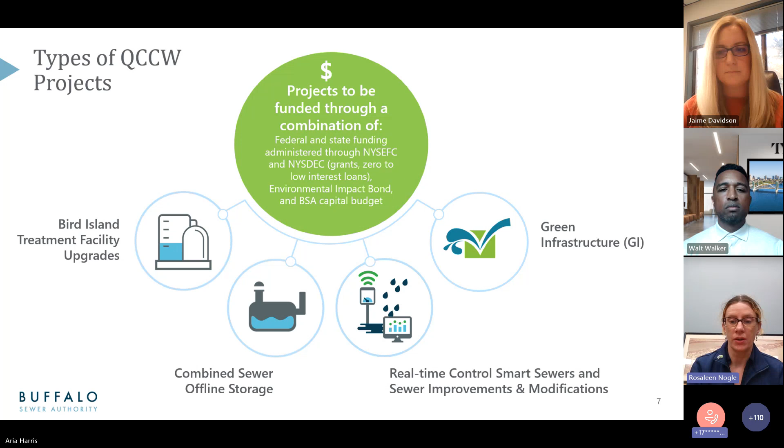And then we are also going to be entering into the world of combined sewer offline storage in the next few years. We've already started last night with a scoping session on a project on Delavan, and we look forward to sharing more information about many of those projects.

Thank you, Rosie, a great overview. We've broken up this next section on upcoming projects into two sections: one on the upcoming collection systems projects, and one section on the upcoming facility and Bird Island projects. So for this segment on the collection systems projects, I'm going to turn it over to Jamie.

Thanks, Walt. Yes, so the first round of projects that will be coming up in 2025 for construction are a series of modifications to existing sewer patrol points in Buffalo Sewer's collection system. I think a lot of people on this call are familiar with Buffalo Sewer, but if you're not, a sewer patrol point is really a regulator structure.

So what that does is in dry weather, base flow goes through the structure. It's considered an underflow pipe. And as wet weather events happen and the water rises, it will overflow an overflow weir in the structure and then go out a combined sewer overflow. So the point of these projects is really to try to maximize the amount of wet weather flow that is getting to the treatment plant for treatment and minimize the amount of water that is getting out to the river and to the adjacent water bodies untreated.

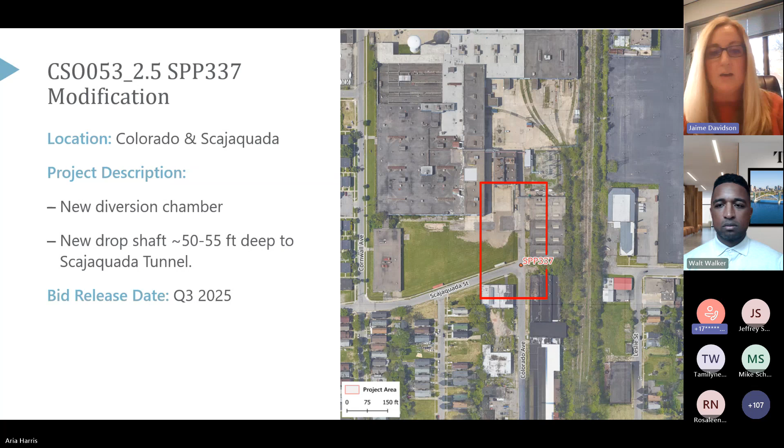That will ultimately be making it to the Scajaquada Tunnel. So we will be putting in a new diversion chamber at the sewer patrol point, and also a new drop shaft that's going to be about 50 to 55 feet deep, and it needs to be designed to accommodate a flow of about 48 MGD. So that'll give you an idea of how substantial that is. That project, along with all of these projects, is expected to come out for bid hopefully in Q3, potentially Q4 of 2025.

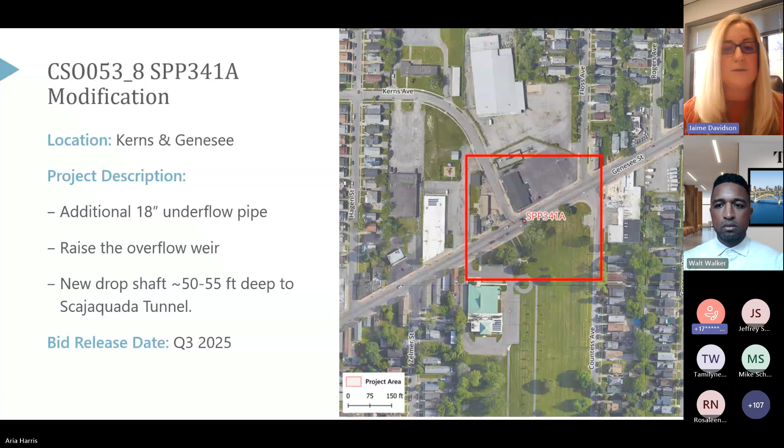So the next site is the Genesee site. Similar to Colorado, this one will also involve a drop shaft. We will be doing some modifications to the actual sewer patrol point, which include raising the overflow weir and installing some additional underflow pipe that is 18 inches in diameter. Ultimately, this will move into a new drop shaft that will be located in Schiller Park, which is the green area shown there. Again, this drop shaft is expected to be 50 to 55 feet deep. This one is a little bit smaller than the previous, but it's going to accommodate about 26 MGD, so that'll give you an idea of the size of that that will be coming up.

And then the remaining 6 projects are really a series of weir modifications and additional improvements. This one at Bailey and Kerns is going to enlarge the underflow orifice, and in addition to doing that, we are going to both raise and lengthen the weir. Very likely there will be a serpentine style weir that will be installed in this location.

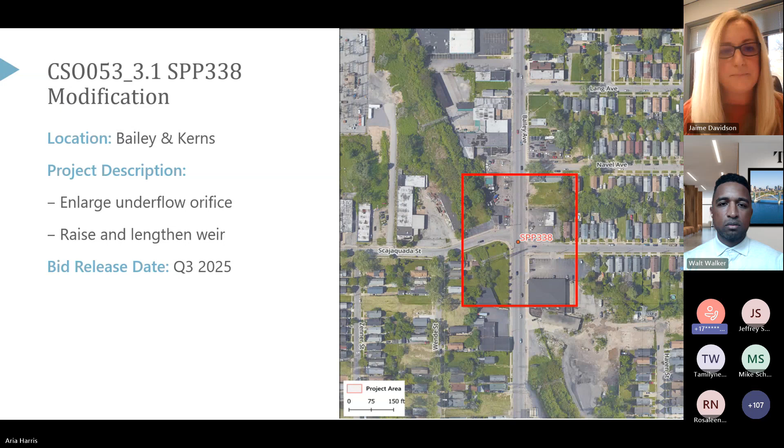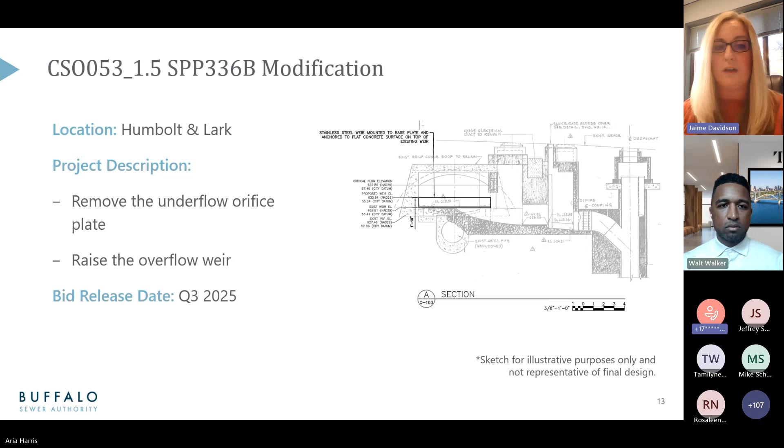The next one is Humboldt and Lark, SPP 336B. This might be one of the more simpler of the projects. This is just removing an underflow orifice plate and raising the existing weir.

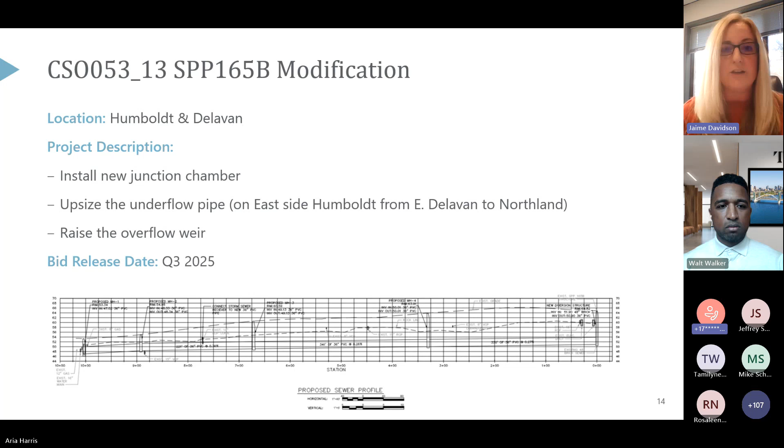This modification at Humboldt and Delavan, in addition to raising an overflow weir, actually involves installation of a new junction chamber to facilitate an upsized pipe. So we're upsizing the existing underflow pipe, about 1,000 linear feet of 24-inch sewer, to 36-inch. This one will be more substantial of the SPP modification projects in this contract.

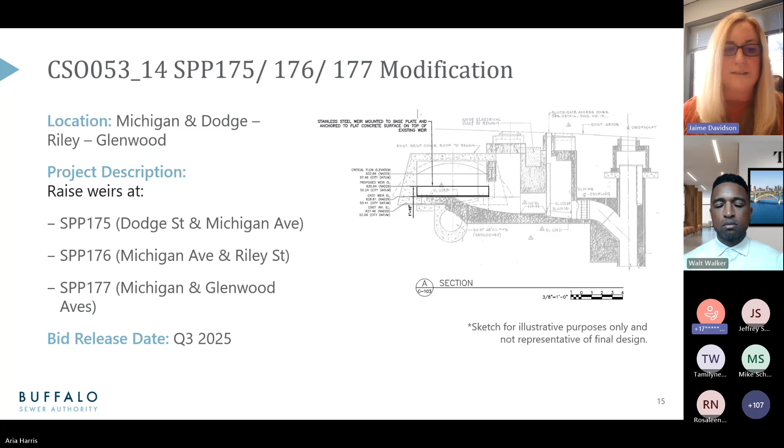And then the last grouping, there's 3 different sites all on Michigan that will include weir raising. And with that, I will hand it back to Walt.

Thank you, Jamie. All right, so moving on to facility and offline storage projects. We have Sydney and Lark and Edison Martha offline storage. Those are going to be significant projects happening in the city.

Still in the process of conceptual design. Our program team will be taking it to approximately 30% design, getting the concepts hashed out, at which point they'll be released as an RFP for another design consultant to take that to the finish line.

Breckenridge Street CSO project design underway. Bid advertisement will be occurring in Q1 of next year. And then we have several other large facility projects that I'll talk about in the upcoming slides.

All right, first one, another offline storage project at Sydney and Lark, 3.2 million gallon underground tank, just a stone's throw away from the Kensington Expressway. The Sewer Authority is in the process of negotiating ownership of that lot, but the goal is to dewater via gravity to the Scajaquada Tunnel interceptor, and the RFP release date for that is by the end of this year.

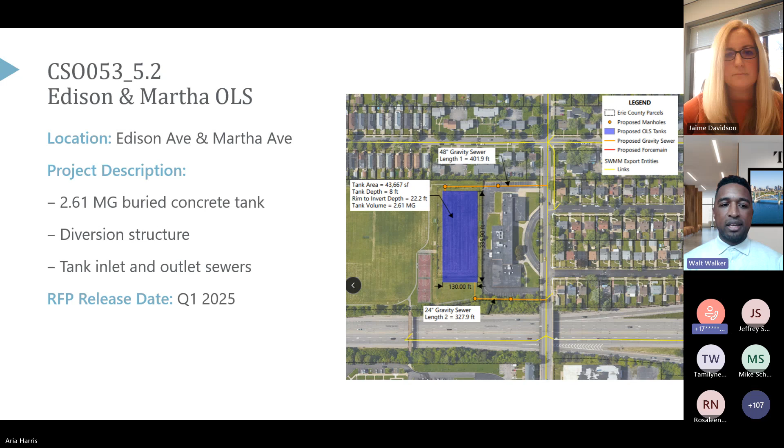Edison and Martha offline storage tank right by Roosevelt Park and a school lot, a 2.6 million gallon buried concrete tank, not as deep as the Sydney and Lark, but significantly wider, which will feature tank inlet and outlet sewers.

Breckenridge Street CSO project. This is a project that was reimagined from traditional real-time controls for those that are aware of some of the previous real-time controls projects. But this is going to, after some alternative analysis, now be converted into a CSO sewer line project.

Occurring between Breckenridge Street and West Ave, all the way to Lafayette and West Ave. Goal of this project is to replace and reverse the slope of an old brick Breckenridge Street sewer, over 100 plus years old, to discharge the new sewer on West Ave. The size of this line will be approximately 30-inch in diameter, RCP pipe as of now.

And the new West Ave line will connect to a drop pipe manhole structure at the Scajaquada tunnel. So in addition to the deep excavation for the CSO pipe, there'll also be this deep manhole structure. So a lot of excavation and potential dewatering.

All right, South Buffalo Pump Station, by the Buffalo River, off the intersection of Bailey and Old Bailey Avenue, which is right south of the intersection of Elk and Bailey.

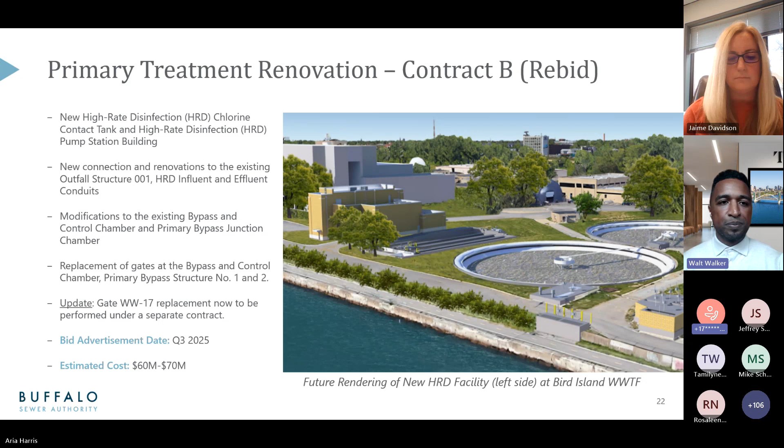A few additional details on the HRD pump station. I won't get too much into details here, but this presentation will be made available after this meeting is complete. 5 40 MGD submersible pumps, 160 MGD capacity, 3 chemical storage tanks for the sodium hypochlorite.

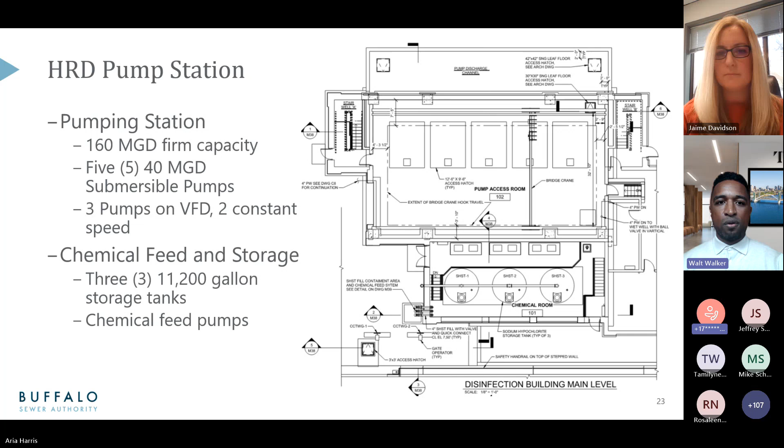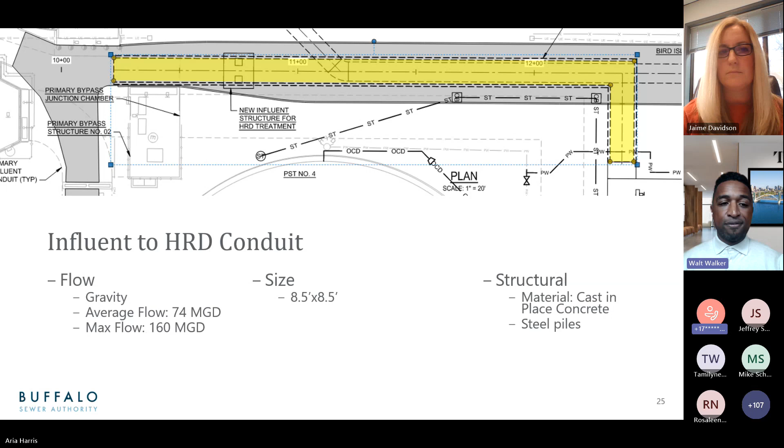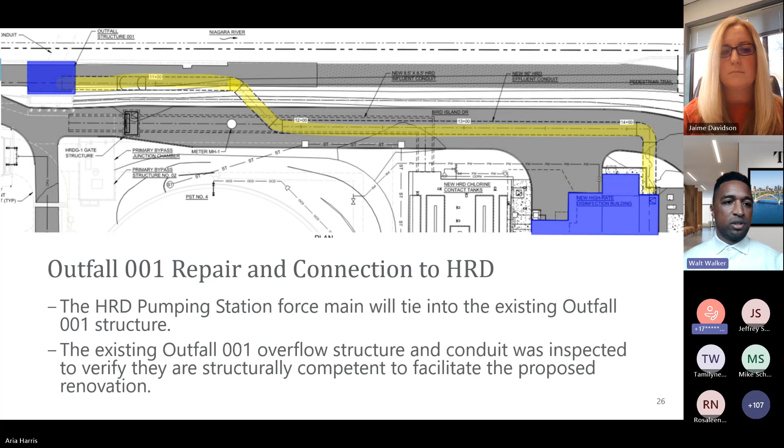Here you can see the size and layout of that influent to the HRD conduit, and then the effluent conduit that's connecting from the HRD facility to the outfall 001 structure, and some of that encroachment onto the shoreline trail.

Summary of major work and coordination items for the primary treatment renovation contract, Contract B. I mentioned some of this already with the deep excavation and dewatering, construction of the new facility itself, and the delivery of the large pieces of equipment through the North Gate.

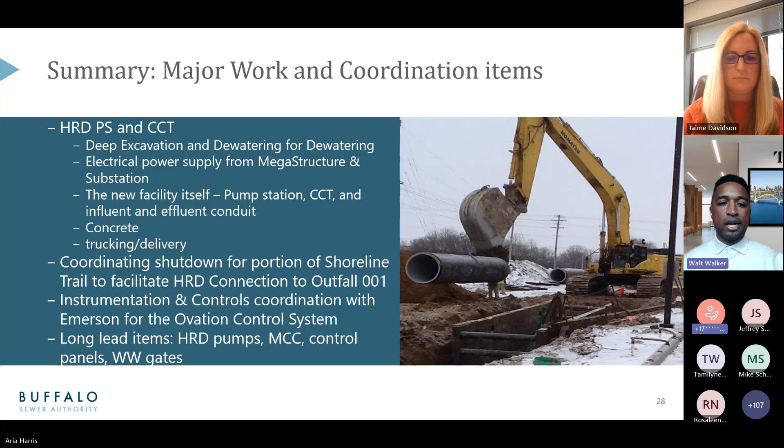Coordinating shutdown for a portion of the shoreline trail to facilitate the connection of that HRD conduit to outfall 001. The instrumentation and controls coordination, and then when we're talking about the equipment and schedule coordination — just some of those big, long lead items: those large HRD pumps, the motor control center, the various control panels, and the new wastewater control gates throughout the bypass and control structures.

So to this point, we focused on the upcoming projects in 2024 and 2025. As mentioned at the top of this call, we will continue to have open house info sessions in the future as additional projects are in the pipeline over the next decade. Some of the future construction projects relate to weir modifications, drop shaft modifications, upsizing underflow pipes, and future offline storage projects.

Several of us attended a community meeting and environmental impact statement hearing on the East Delavan sewer project. That's in the very early stages, as a design option has not yet been selected, but it's on the radar for upcoming construction opportunity.

The primary treatment renovation is phase 2 of 3 of some large upgrades at the facility. Phase 3 is the secondary system expansion, which has currently started design. That project will add additional treatment capacity on the back end to ultimately get Buffalo Sewer to 560 MGD wet weather treatment capacity.

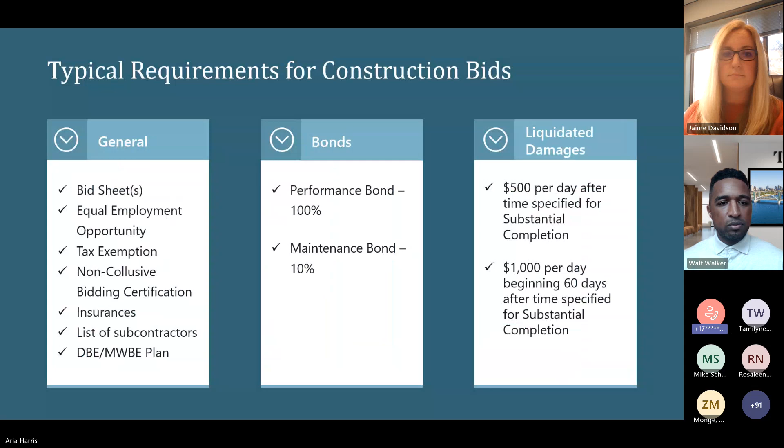So it depends on the project. For example, for Sydney and Lark, that type of contract will be design, so that'll be an RFP coming out in Q4 2024. For the Breckenridge Street CSO project, for the raw wastewater and settled wastewater, that'll be a construction project. So depending on the type of contract, the program management team will be involved, or other consultants may be involved in bringing the design to a certain point. We may take the project to full design and put it out for bid advertisement. So if you look at that column, and this goes for the collection system slide as well, the type of contract will correlate to the date of bid advertisement.

Next question, our company currently provides 811 call locating to Buffalo Sewer. Will private utility locating also be required for construction work? How can we participate in this work? Would it be as a subcontractor on a construction RFP? The answer to that is yes. Utility verification is certainly part of the scope.